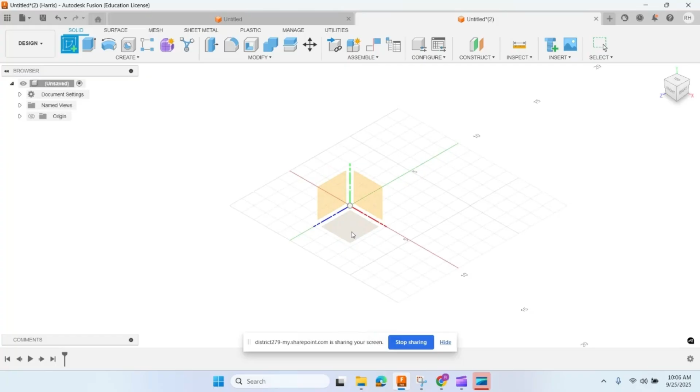Okay, now we are going to start making some features on our three-dimensional objects. So first, let's get a three-dimensional object. Okay, so the first thing I want to do is create a sketch like we always do. I'm going to choose the tabletop, and then I'm going to make a rectangle. I believe that I went with a 4x6 rectangle. Okay, you can double check that, but that sounds right. Okay.

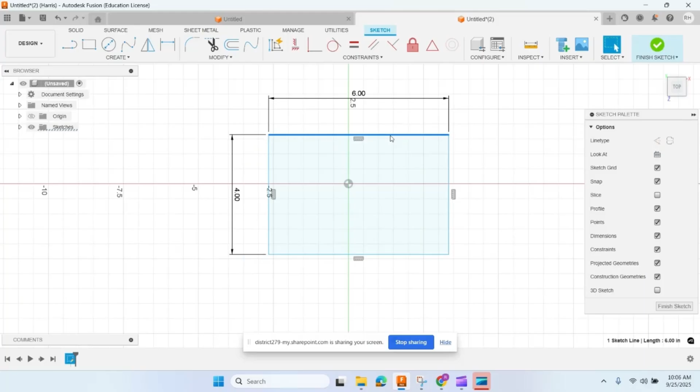Now, got this rectangle. I'm going to finish the sketch and then extrude it like you did in the last one. So I can choose it, click this, and I believe I made it 5 inches. Whatever height, type that in, and we've got a box. Okay, let's go back and just double check. Okay, oh, height of 3 inches.

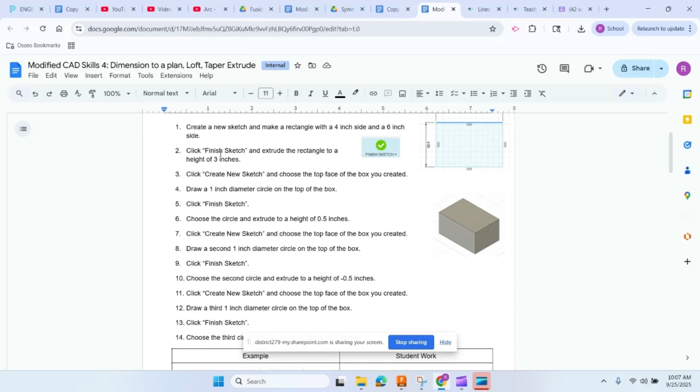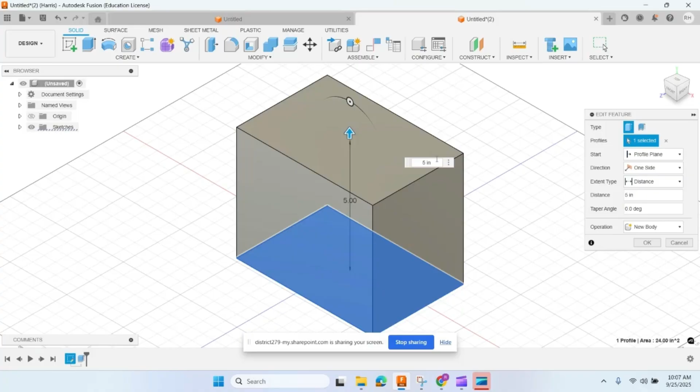All right, well, let's go ahead and modify this. To modify it, I'm going to go down here, and this is my original sketch. This is my extrusion. So if I wanted to change my original sketch, I'd double click on this one. If I want to change my extrusion, I'll double click on that one. And I'll put 3 inches there. And now I've got it. Good to go.

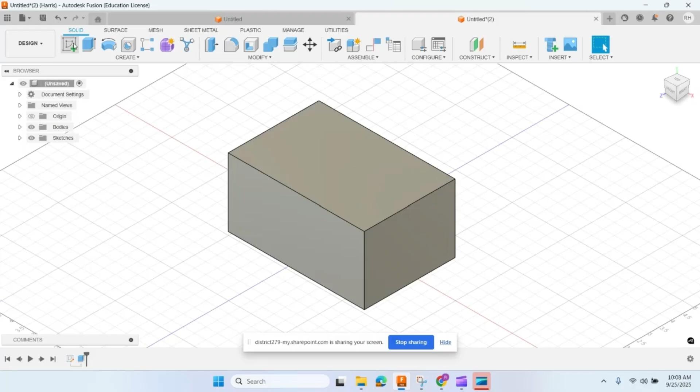All right, now I want to put some circles on this thing. And you can do this with any shape, but I'm going to use circles. So you can do squares, you can do rectangles, you can make squiggly shapes with your spline tool, but it's up to you. So if you do this assignment and you want to do different shapes, perfectly fine. Create a sketch, but now instead of going down here and choosing the plane, I'm actually going to choose a face on my box. So now I'm going to be sketching on this face.

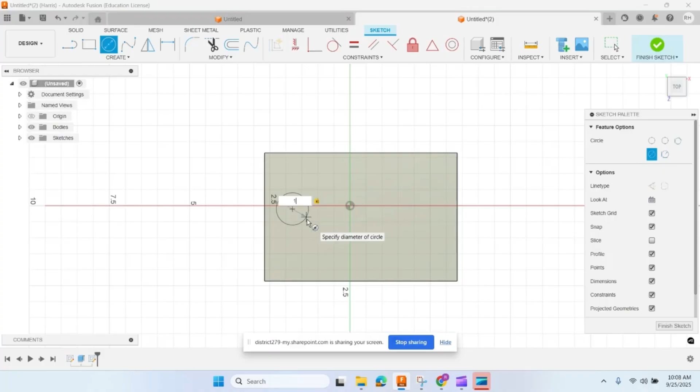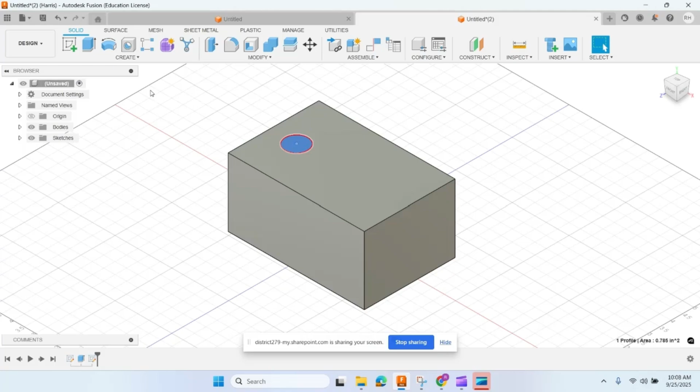All right. So let's make a circle, 1 inch diameter. Okay. I'm going to go ahead and put it wherever I want. And then I'm going to finish the sketch. Okay. Now you could make all three circles and then do your extrusions, or you can do them one at a time. You get the same results. So I'm going to click the circle and extrude this one 0.5 inches. So you see it sticks out.

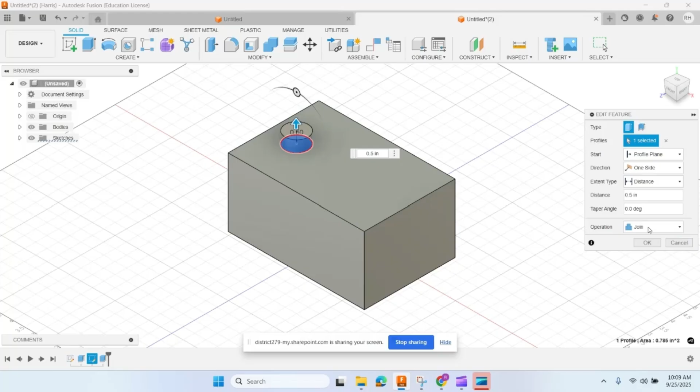And actually, I'm going to get into this again because I want you to see when I extrude a shape and I'm on top of this box, it's automatically joining the two. This is the default. When you get more advanced, you can do other things. But for now, we're just joining the two together. So they are now like one piece.

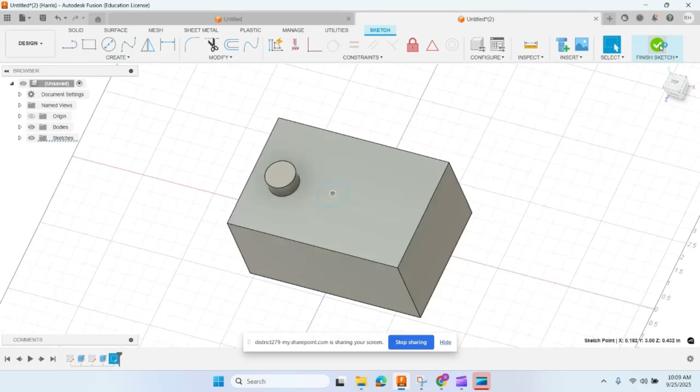All right. So now that I've got that, I can create my sketch. Again, choose the top face. And I'm going to go ahead and draw that circle and finish sketch. And then if some of you are thinking, why don't I just draw all three circles at the same time? You can, but you've got to make them separate sketches, because when I tried it where I did all three circles, then when I went to extrude them, they all did the same thing.

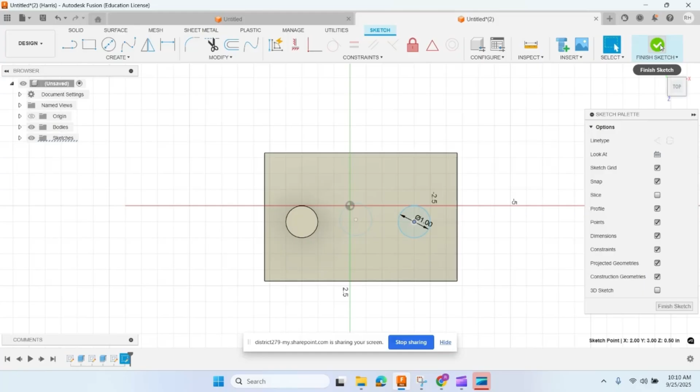So now I've got three circles, and you can do things to line them up. These are not evenly spaced. In a later design thing, when we use the rectangular pattern, we'll think more about spacing. But here I'm just getting them on there. But if you do all three circles on the same sketch, then when you extrude them, they're linked. So when I extrude this one, I couldn't get this one to do something separate.

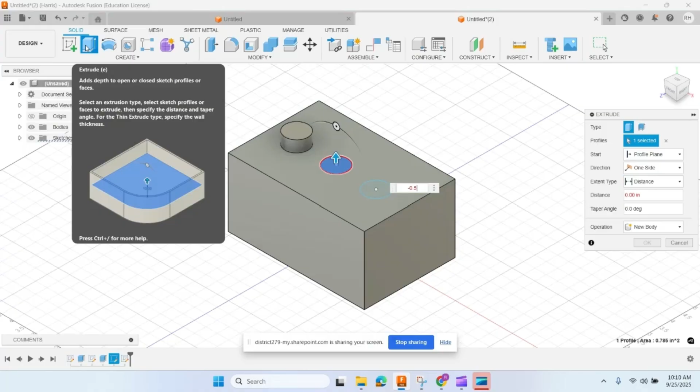Okay, I'll show you now what we're trying to do. So now that I've got them all on there, I'm going to choose that circle and extrude it. And I'm going to do negative 0.5, hit enter, and you see it goes in. Positive, negative. Okay, I'll take this one, extrude it. Actually, here's what I can do. -3, and what you'll see there is that it's gone all the way through because this thing is 3 inches thick, right?

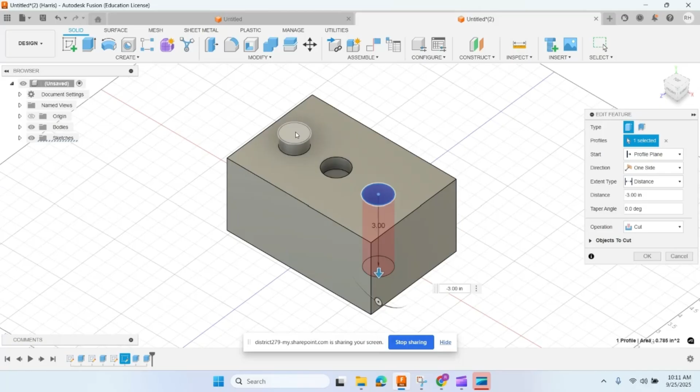Now let's go ahead and just get into this. You can also grab this arrow and do extrusions as well. So I can go up or I can go down. And now that I've gone into the thing, notice that my operation is now a cut. Okay, so I'm cutting into this block. So when I go in, it's a cut. When I go on top, it's a join. So those are some things to think about.

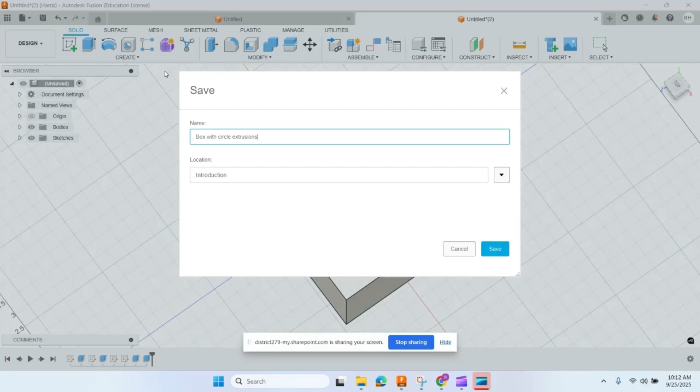Okay, so now I'm clicking that and I look. One of them is a bump that comes up. One of them is a thing that goes in, and one of them is a hole that goes all the way through. And there's my shape. As always, I'm going to save it. Box with Circle Extrusions, or something else that tells me what it is. Then I'm going to get a screenshot, put it in the assignment, and move on. And now I'm starting to make some pretty cool things.